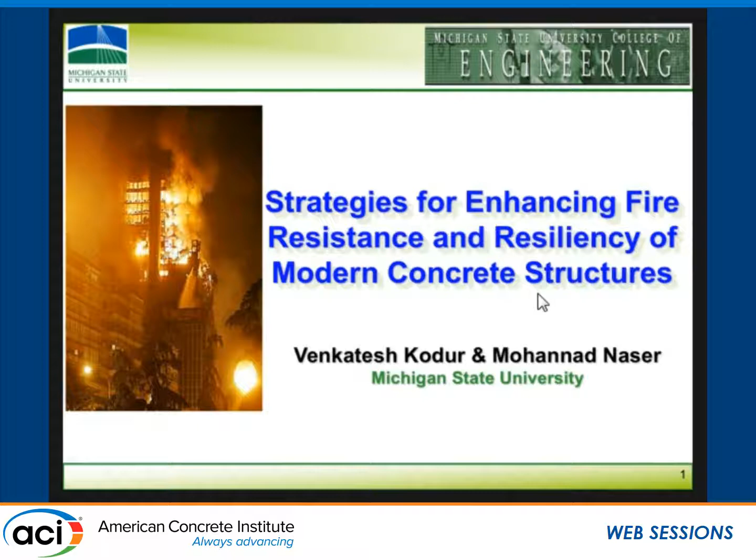Let me explain what modern concrete structures are and why this is important. Conventional concrete, both from the material and the type of buildings and structural systems we have, has significantly changed over the last few years. Though concrete is excellent in terms of fire resistance, we may not draw the same conclusion with some of the new constructions in terms of materials, structural shapes, and the buildings we have. So we can adopt new strategies to enhance the fire resistance. That's what I'm going to show in this presentation.

First, I'll explain why fire is a significant hazard for the built environment. Then I'll talk about the problems with modern construction, basically modern buildings. I'm going to present factors with significant influence based on a lot of experimental and numerical studies, especially relating to new types of concrete. Then I'm going to present some strategies that can be adopted.

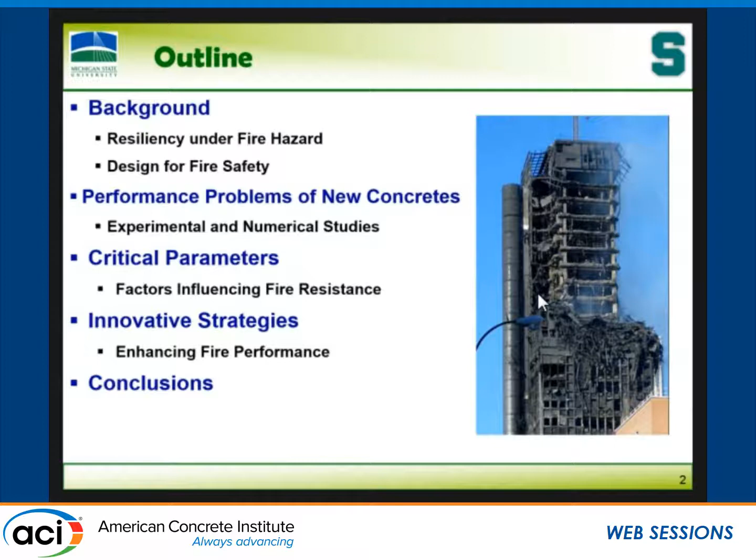Concrete is one of the most widely used materials in building construction as well as infrastructure. One of the main advantages of concrete, though a lot of people don't even know about this, is its fire resistance properties - that's a significant benefit of using concrete. That's how it came into existence as well.

There has been significant research and development activity over the last 3 or 4 decades, especially with concrete technology. Today we are making concretes as strong as steel. In our lab recently we tested ultra high performance concrete beams, one of the projects with the US Air Force, which are 240 megapascals. When I was a student, not too long ago, I used to study concretes which were 20 megapascals. Look at the way we have evolved.

Though I think we are not using 240 megapascals in the field, we are using 90, 100 megapascals becoming common, even in the precast industry. Fire is a major requirement when you use concrete in buildings. A lot of people don't realize this because a lot of it is in background documents, appendices and stuff like that. In fact, that's the governing factor for a lot of designs.

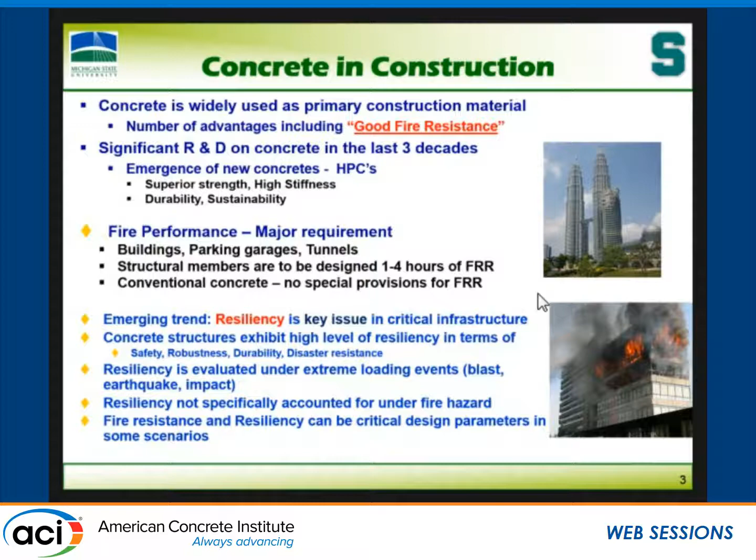The emerging trend over the last few years, based on man-made threats such as terrorism, is basically to prevent and enhance resistance. Resiliency is becoming a key design parameter in a lot of critical infrastructure. Concrete structures typically exhibit a high level of resiliency, no problem there, especially under events such as impact loading, blast, etc. However, when it comes to fire hazard, resiliency is not talked about or looked at in the design scenarios.

This statistics you saw in the first presentation - both Steve's - went through how fire came into play as a design issue. If you look at the data, there were more than 1.3 million fires in the US in 2015. Many of them were residential fires, single family homes, but there was also a significant number of high-rise fires, as the data indicated. It can cause thousands and billions of dollars of damage around the world.

Earthquake is a problem on the west coast of the US. Hurricanes are a problem in other regions too. On the west coast you have seismic, on the east coast or the south you may have hurricanes, in the Midwest you have tornadoes, for example. But fire - from small communities to big communities, everywhere - is a hazard which has to be considered in design.

Fire can happen, as was shown, after most earthquakes - including recent earthquakes in New Zealand and Chile, there were post-earthquake fires. A truck hits a bridge, a huge fire starts - impact doesn't do much, but the fire does more damage than the impact itself. On 9/11, the towers would have been standing today if there were no significant fires.

The towers collapsed not because of the impact, but because of the fire. So fire is a significant hazard for the built environment. It's impossible to prevent all fires. So there are a lot of systems put in place: sprinklers, heat detectors, smoke detectors, exit paths. Then comes the last one, structural fire safety.

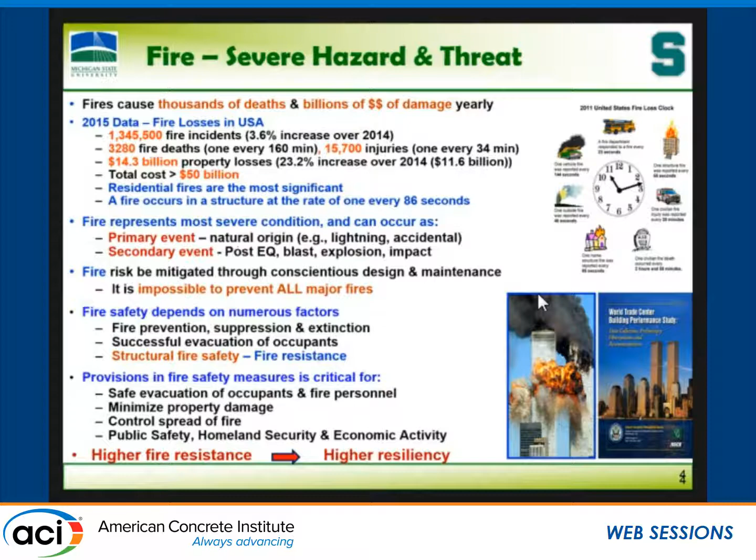That's what was shown in the World Trade Center buildings, recently in California near San Francisco, and in Tehran recently. So anywhere you see it, the more it grows, the worse it is. So to keep that fire small, compartmentation is key, and that's what fire resistance is mostly about. Now, higher the fire resistance, higher the resiliency.

Now, just quickly, there was a fire in this building. This is a concrete building in Delft Faculty of Architecture. I was involved as part of the investigation of this fire with 2 other people from the US. In this building, a coffee kettle caused an electric short circuit, and a huge fire started in this 13-story building, a significant massive building built in the 60s. The fire continued to burn.

First, I think they thought it was just a water leak, because there was a small mini explosion from the short circuit around the coffee kettle. Pipes broke, water went down. Then it took a certain while. There was a lot of wood in this building. Though it was a concrete building, all the formwork, first of all in the architectural studios, there was a huge amount of wood, and all the formwork was left in place.

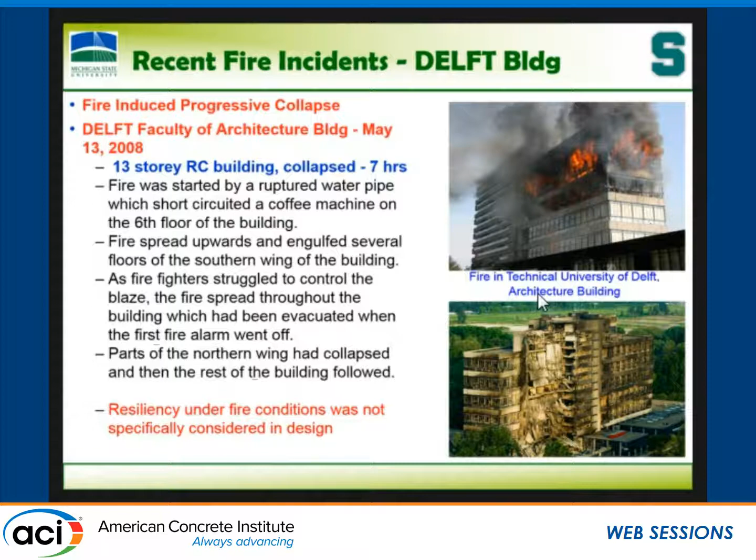So the fire started to burn, huge amounts of fire, and it spread to 2-3 stories. Fifty firefighters would have died if they had not evacuated in time, or if they had not come out in time. The insurance payout was 100 million euros on this one. So the building collapsed. This wasn't designed for fire-induced progressive collapse, which was an issue regarding resiliency.

Now, typically what we do in conventional construction, as I said, has significantly high fire resistance, so never a problem. All we need to do in these buildings is basically provide sufficient cover thickness. If there is a concrete member, all we want to make sure is that the reinforcement temperature doesn't reach about 500 to 550 degrees Centigrade, or 1000 degrees Fahrenheit. As long as you do this, typically no problem.

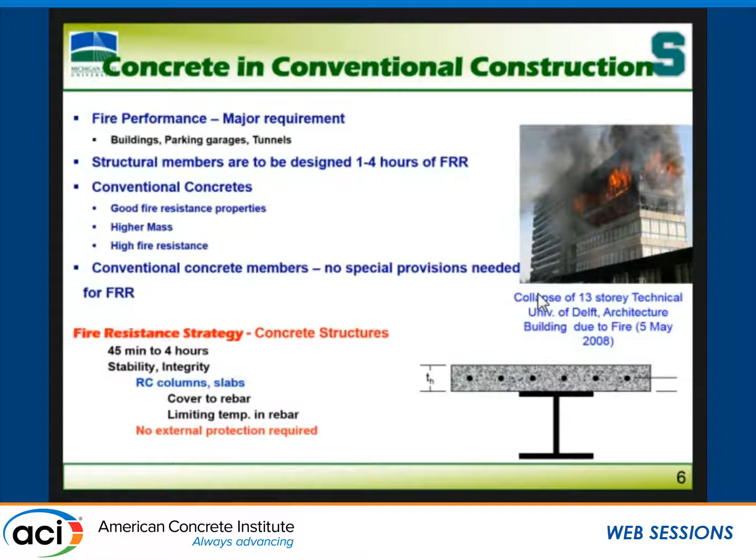This is what we used to do, because of the good fire resistance of conventional concretes. The second thing that matters is the thickness of the concrete member or the cross section. You have to have minimum dimensions so that you have enough mass. In fact, ACI 216 currently specifies the requirements for 1 hour, 1.5 hours, 2 hours, 3 hours, and 4 hours of fire resistance in columns.

If you have an 8-inch column, that minimum cross-section dimension, you can easily get 1 hour of fire resistance. If it's 10 inches, you can get 2 hours. It's as simple as that. Now, this used to be very good, because the more mass you have, since concrete strengths used to be 40, 30, 20 megapascals, the higher reserve capacity you have. Typically, we never used to use all these nonlinear methods and stuff to optimize it in years past.

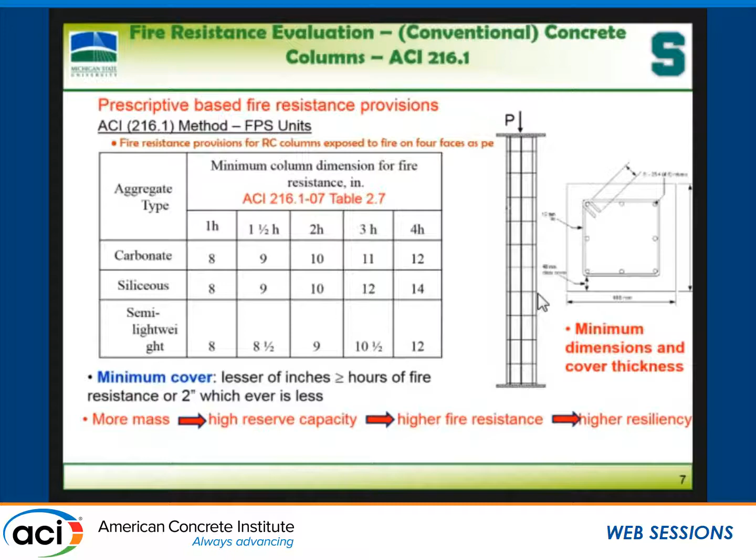Now, higher fire resistance, higher resiliency. Now, what are we looking at? Modern buildings typically are much, much taller than what used to be before. And our cross sections are becoming smaller and smaller because we adopt all this nonlinear analysis, advanced techniques, and all this, as you all know.

Now, from the fire point of view, typically today's buildings are much worse in terms of what I call the fire load. Too much furniture, everything - we accumulate too much junk, whether it's in our closets or our shoes.

10 pairs of shoes, 12 pairs of shoes. Before, traditionally we used to have 1 pair of shoes. My son has about 20 pairs - walking in the gym, he needs 4 pairs: one to the basketball court, from basketball court to walk to his locker room, locker room to come out, and then the snowshoes. It's unbelievable, the civilization is changing.

And this is very bad from the point of view of fire. I know it's bad from a lot of other societal aspects too, okay? And this is very bad.

Our compartmentation has changed. Before, we used to have nice compartments - go to older European traditional buildings. Today's buildings, everything needs to be open. My wife, she wants to cook and watch the TV at the same time, she wants to watch the kids. Everything, you leave it open. It's very bad for fire, very bad from the fire safety point of view.

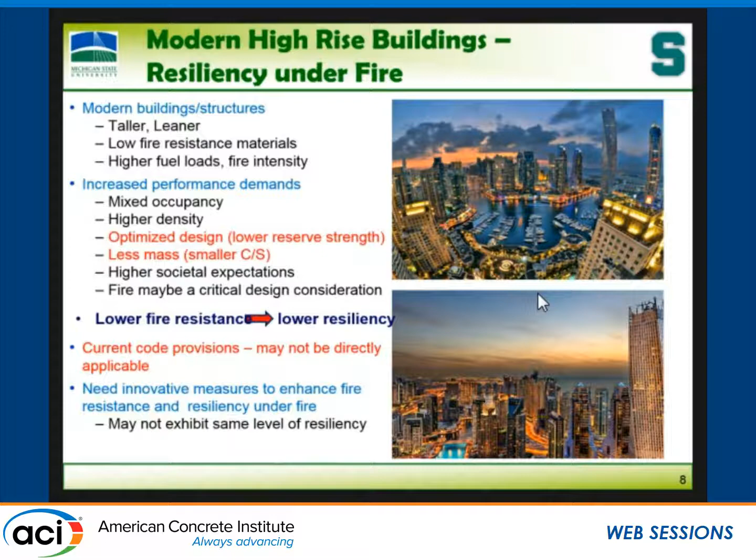So today's buildings - my message here is it's very bad, both in terms of fire loads as well as ventilation characteristics, which can go out of control easily. So current provisions may not be directly applicable. We need to make innovative measures.

Look at it from the structural side - it's not just the building heights that are changing. We used to use nice solid slabs, nice solid beams. Look at today's cross sections - everywhere we are making holes, to send things through, because this is where we are going.

Look at this deck slab - we were reducing, typically lower mass. Because of this, you have lower thermal mass, lower reserve capacity, lower fire resistance. It's not good - this is what is happening.

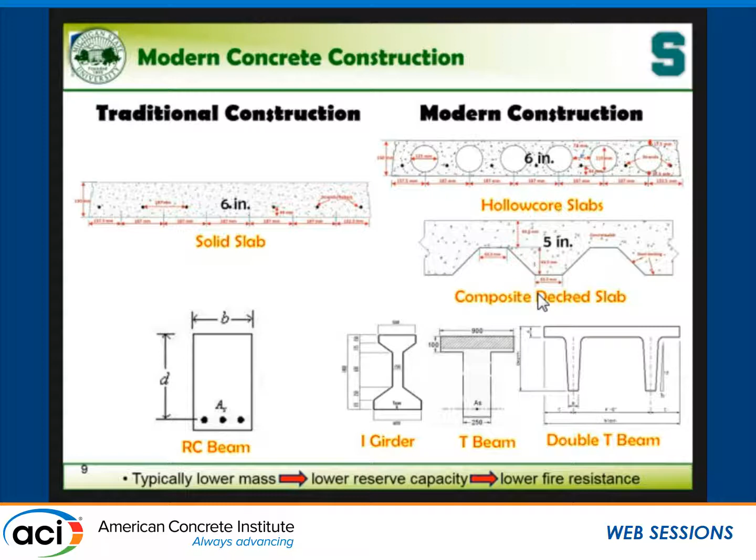Now what else is happening? The third problem we have is these higher strength materials. Any newer materials have lower fire resistance than the conventional materials, whether it's wood, concrete, or steel. Why is it? These concretes are made taking into consideration getting higher strength, higher stiffness - they're all good. Typically they have a lower water-cement ratio, that's where you get the higher strength. And you add a lot of fines - silica fume, fly ash - all these things you throw in, right?

Typically, as we used to know, concrete in my undergraduate days used to be made of cement, some stone, some sand, and some water. Today we add so many chemicals, just like we take vitamins every day. So concrete, you throw in a lot of these admixtures, early age cement - you can get any property. Anything you want: early age strength or later age strength, fine workability. When you add all these things, the characteristics change, especially at higher temperatures.

Now let me explain how. This concrete is a conventional concrete - this is the loss with temperature, strength loss, 100%. See how it drops around 800 degrees centigrade. But look at the higher strength concretes, or modern concretes - can you see that there? Even at 150 degrees centigrade, there is a significant drop.

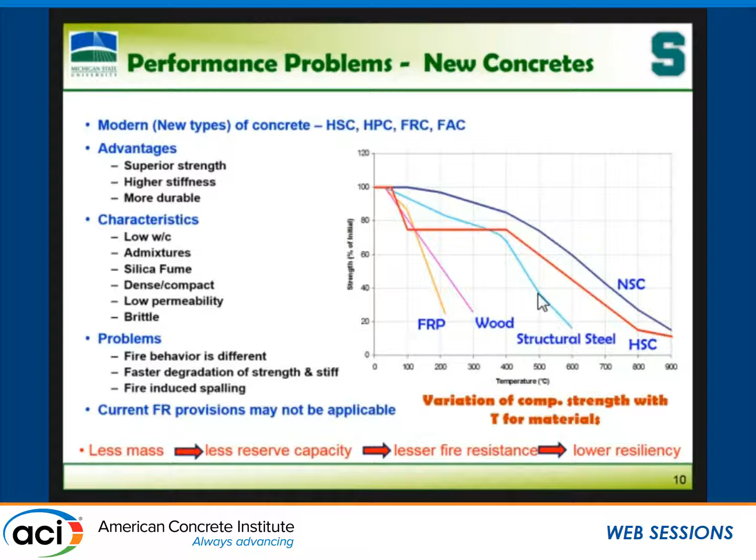This is not good. The second, much bigger problem is the so-called spalling which can happen in concrete. What happens - this is a conventional concrete column. We tested hundreds of these columns in Canada, one of the projects was with the Portland Cement Association. Look at the high strength concrete column.

What is happening? This concrete has, as I said, a permeability of about 10 to the power of minus 16 - that's a conventional normal strength concrete, 40 megapascals versus 110 megapascals. When you reduce the water-cement ratio significantly and put in all these fines, the permeability reduces, which is good from the durability point of view, so everyone is happy with that. But on the other hand, when these columns are exposed to fire, this permeability reduces by about 100 to 1,000 times - it's very hard to pin down these permeability values.

When you have this column exposed to fire - this is the new concrete - water becomes vapor. That vapor cannot easily come out because the conventional concrete has much higher permeability in its pores. But in the new concrete, the permeability is very small, so that water vapor cannot come out, and the pressure starts to build up inside the cross section. When you increase the compressive strength from 40 to 110, the tensile strength only goes up by 2.5 to 4 megapascals - not much.

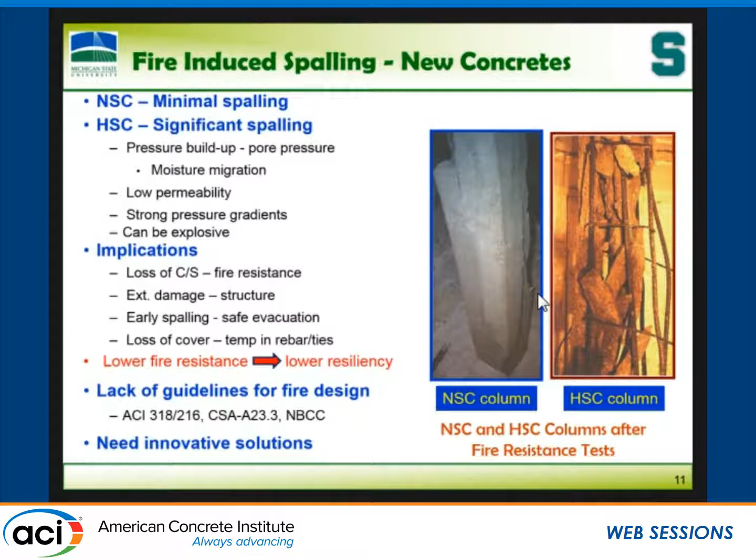This was seen in Eurotunnel, in a lot of practical real-life fires, as well as a lot of tunnel fires. This is a very common issue, especially when the fire scenarios are very intense. We have done a lot of work, as well as other groups, to establish the problems with this newer type of concrete and strategies.

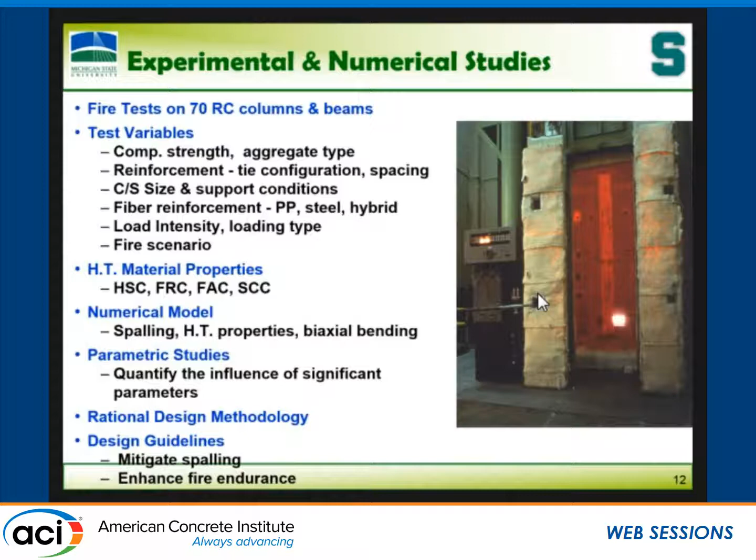We carried out experimental and numerical studies. A number of PhD students graduated in our group, as well as around the world, a number of studies have been done, and some guidelines have been developed.

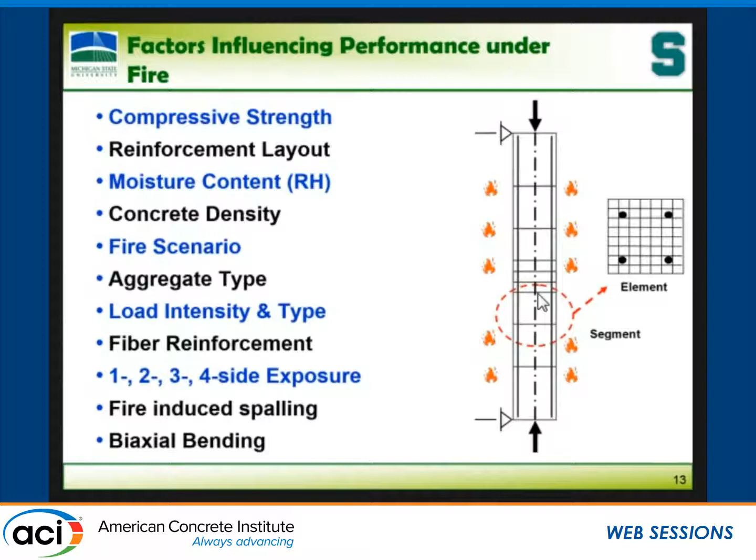I will quickly go into this. I don't have time to go into all the studies, but let me present something quickly to show you how the high strength concrete, or modern concretes, have lower fire resistance as opposed to traditional concretes. A lot of these parameters influence the fire resistance, not one or two. They are interdependent, very complex.

Now look at this. This is a conventional concrete, normal strength concrete. Nothing happens till 6 hours. Take it for granted—these are real tests done on full scale columns at the National Research Council of Canada.

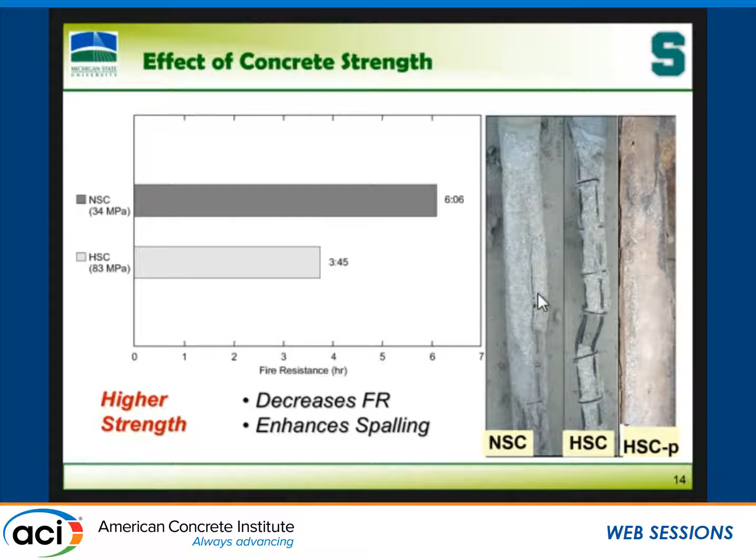But for higher strength concretes, can we expect the same thing? No, it reduces. Up to 3 hours, maybe you are lucky if you get it sometimes.

Then look at the confinement. Conventional concrete, you can have ties like this—this is the conventional way of providing ties. But if the same thing is done for higher strength concrete, look at what happens. Even within 90 minutes, this 110 megapascal column, the ties open up because of the pressure which is generated.

I told you about the spalling. This is what is left after 90 minutes. But if you bend these ties at 135 degrees, wonders happen—this will last for 3 hours, the same column from 90 to 180 minutes.

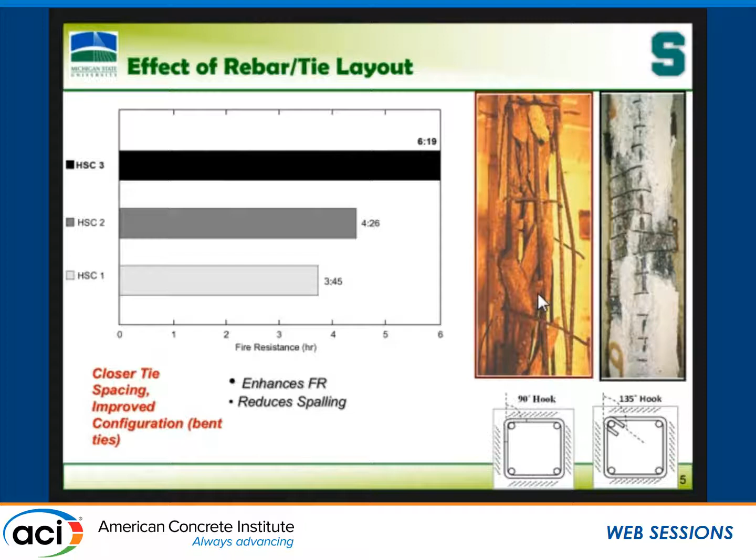Now let's look at that—I don't have much time. The problem is in concrete structures or steel structures, you all know eccentricity is a significant problem, eccentric loading. In fire, we don't even consider this in today's design, biaxial bending or uniaxial bending. Perfectly, you have a column which is loaded uniaxially.

But after 15 or 20 minutes into fire, if it is 4-side exposure, no problem. If it is 3-side exposure, or 2-side exposure, or 1-side exposure, what happens? One side is losing strength quickly, but the other side has significant strength remaining, so your center of gravity doesn't coincide anymore.

So you are going to get either uniaxial or biaxial bending. You all know, I don't have to explain to you, biaxial bending is significant—this is not considered. It is much more a problem with newer constructions and newer high strength concrete, especially because you are using a very small cross section, small mass.

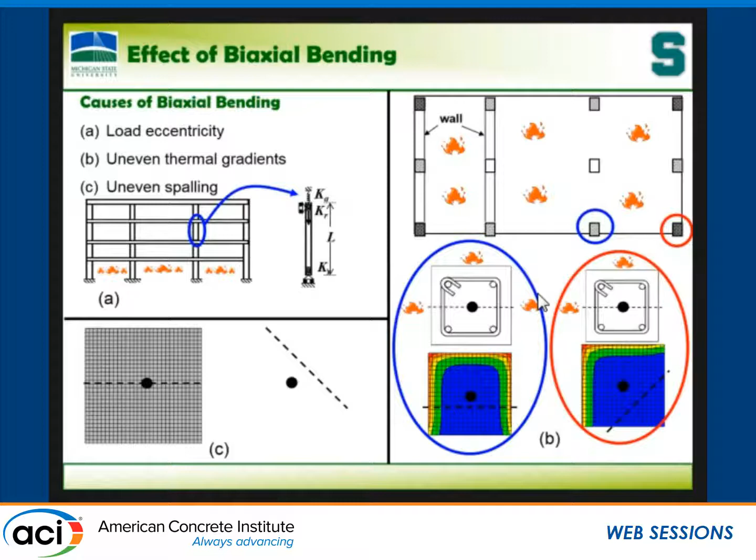So this is 2-side exposure versus 3-side exposure. We always think 4-side exposure is the worst, right? Look at this—this is 4-side exposure versus 2 adjacent side exposure. This is not even properly accounted for in codes and standards.

And typically in a building you can see this. This is a 4-side exposure, but if there is a wall next to it, if the column is built into the wall, you might have 2-side exposure or 1-side exposure.

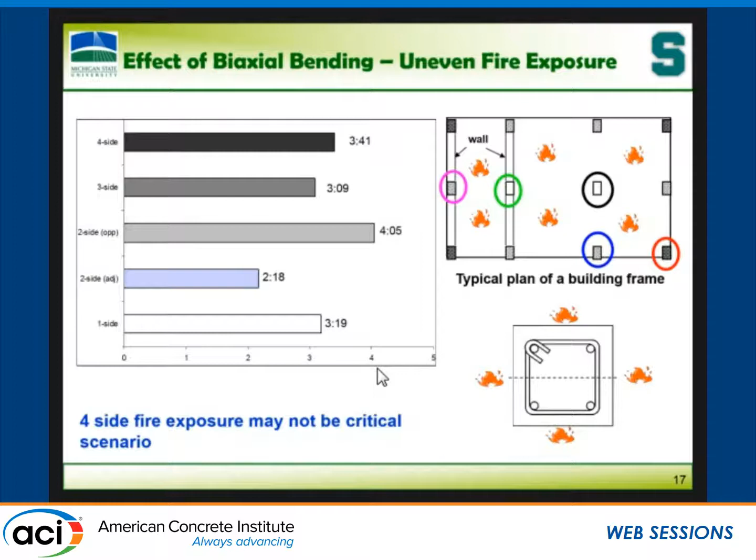Okay, this is what happens. This is the 4-side exposure, as you can see, this is the axial deformation on this column as a function of time. And this is what happens with 2-side exposure. So 4-side exposure, a lot of people think is the worst case scenario—more sides of fire exposure, maybe worst.

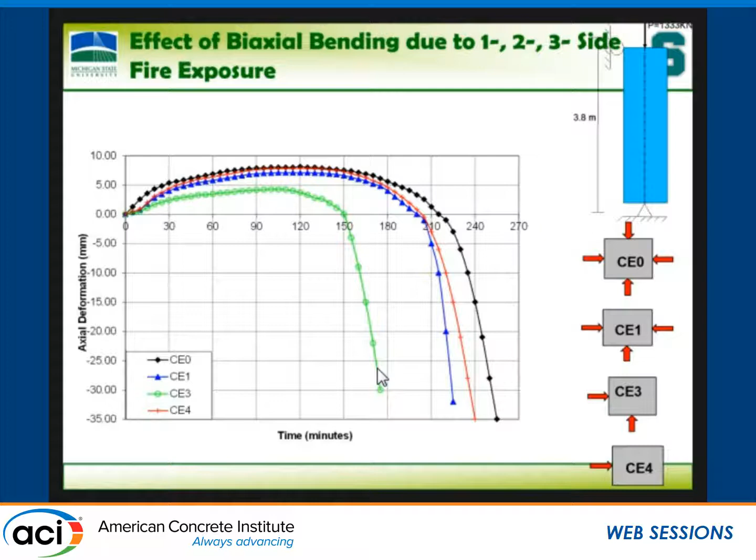Need not be the case. Now, fire severity is a significant thing. Today's fires, as I mentioned to you, are much more like this. We design under ASTM E119 fires, but today's fires, a lot of times, can be very rapidly growing if there is a fire in a parking garage or in a structure, because you have hydrocarbon effects.

Even all these combustibles are much worse than cellulose fires. So much damage is done when the fire goes up, and then sure, it cools down. But the fire resistance under some fires may not fail, while under some design fires, it may be much worse than standard fires.

Now, look at one of the things to overcome this—using fibers. As you can see, this is a concrete column, a high strength concrete column.

Spalling happens in spite of using those ties. But if you add polypropylene fibers...

You don't need too much, about 0.1% by mass. You throw in these fibers. What happens is, when fire occurs, the polypropylene fibers melt at about 160 degrees centigrade inside. They are discontinuous, spread out throughout. When they melt, it creates channels of pores. And through those pores, your pore pressure gets alleviated, no spalling.

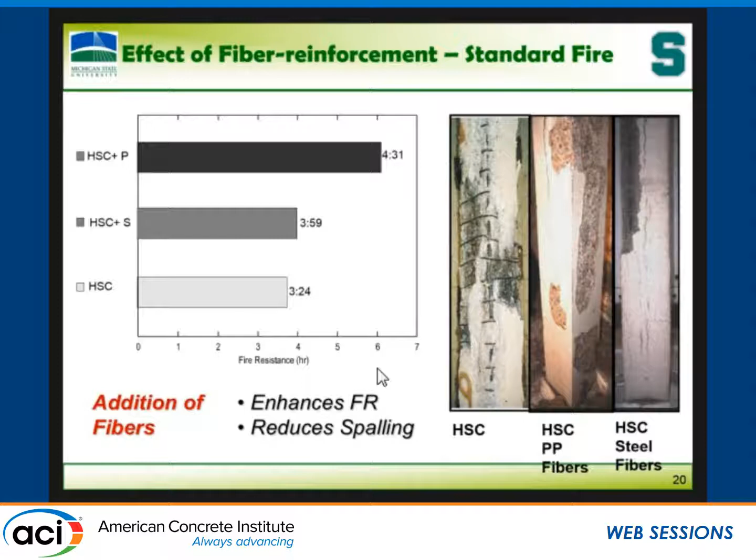So this can continue for a long time. And look at this, even after 3 or 4 hours, very little spalling. You can add steel fibers as well, they are beneficial too. If you want to use it, that's a different story for a different application. But adding fibers can significantly enhance the fire resistance.

These are the same thing, I'm repeating it, so let's skip this. You can use hybrid fibers, especially in tunnel structures. So what are the strategies you can adopt?

Adding more lateral confinement significantly enhances the fire resistance, just like in the case of seismic design. So it obviously enhances the resiliency.

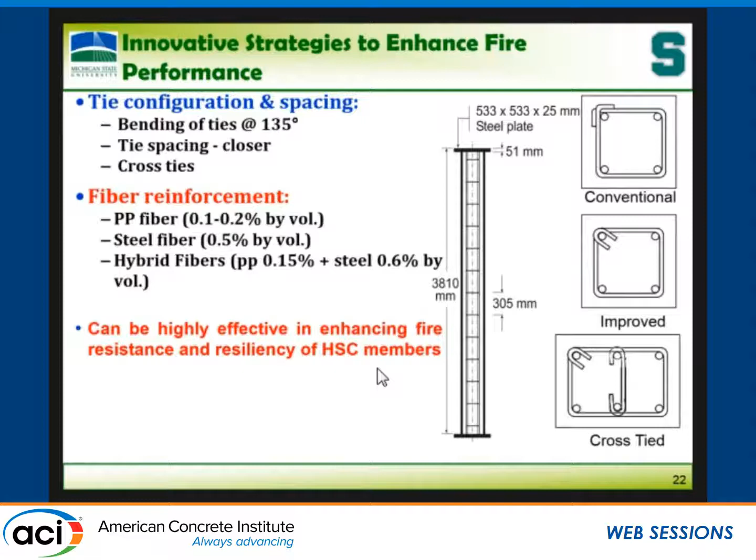Then you can make small modifications—I missed one point, adding fibers obviously, either polypropylene fibers or steel fibers, or a combination of them in different applications. We have tailored this for different applications.

Then you can make modifications either in mix design. Typically limestone aggregate will give you some extra fire resistance, right? Lower the load, higher the fire resistance.

You can add protective layers. That's the European code approach. I don't know how much it is beneficial from a cost-effectiveness standpoint, but the other ones are much more effective.

Just to mention to you, based on our research, this is all incorporated in our ACI 216.1, the latest edition which came out just last year. So ACI 216.1 has these provisions.

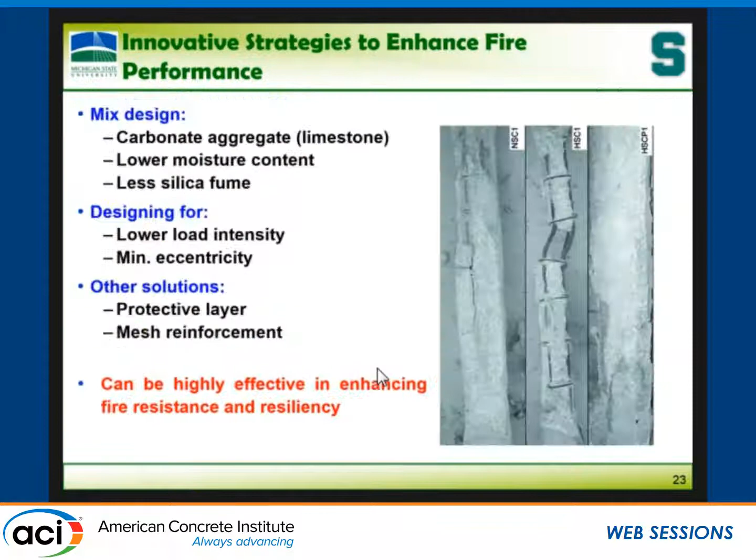Now, the other most important thing, an advancement which is happening, is to carry out rational advanced calculation methods, both from the fire resistance and resiliency point of view. This is not typically done in concrete buildings today, but if you want to establish and show that concrete structures have good fire resistance while taking realistic conditions into account, you have to do a system-level analysis.

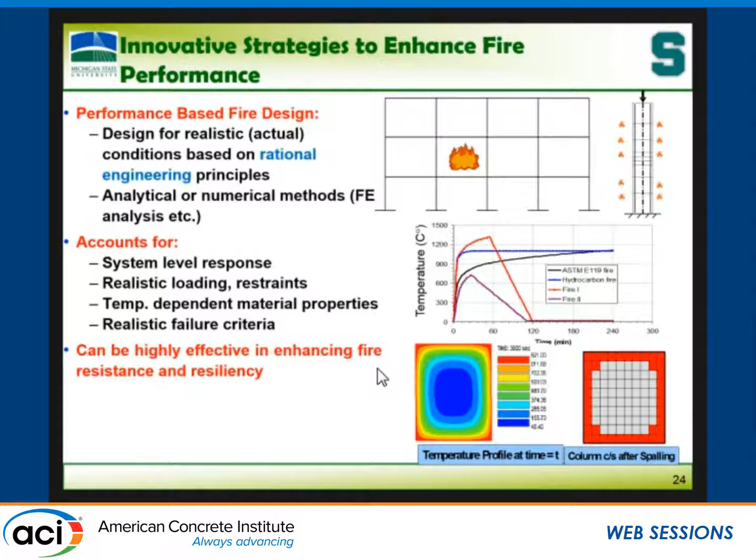By accounting for different fire scenarios—tailoring fire scenarios, load levels, restraint conditions, actual material properties, as well as failure limit states—you can establish this. The procedures are there, and I don't think we have much time.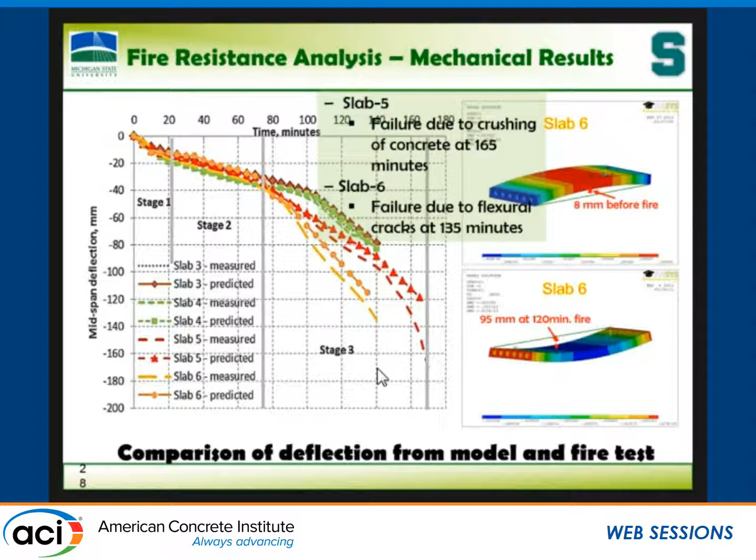So you can generally model this for a specific structure or structural element, both at the elemental level or at the system level, to enhance fire resistance. You can come out with some strategies.

Now, basically in conclusion, all I want to say is resiliency under fire conditions should be considered in design, especially for critical structures. It's very important.

There are a number of problems with respect to newer types of construction, especially with newer types of concretes as well. However, you can develop proper solutions as shown here, either through modifying the tie configuration or fiber reinforcement. You can develop these through proper experiments and numerical methods such as performance-based design.

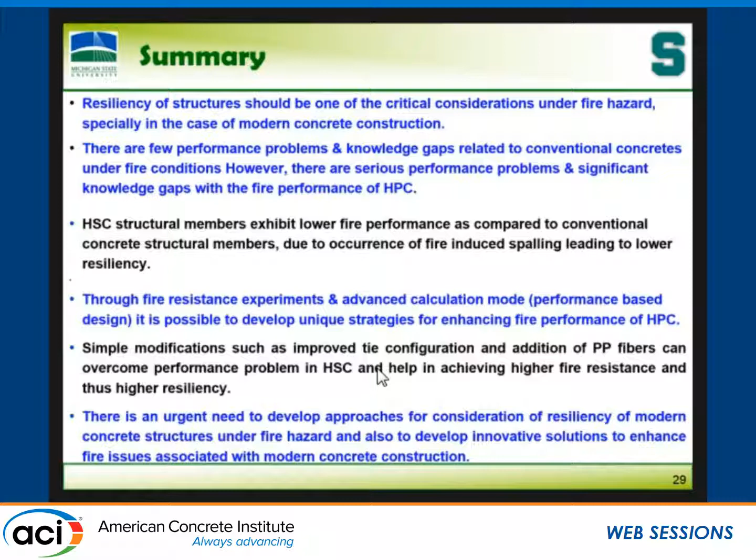But still, there are a number of research areas which are missing, especially related to spalling—for example, how to predict spalling, when spalling occurs, where exactly it occurs. The predictive models are still not there. So I think that's where the research should be going. Thank you very much.

Yeah, so I think I heard you right at the end, I'm going to ask it again. So from the standpoint of spalling, we still don't have a good handle on that—is that a fair statement?

Very good statement. People are working on it, but it's very hard. I think the problem is at higher temperatures, the instrumentation is significant. Even today, with all our advances, we can only measure temperatures at higher temperatures. Strains we cannot measure. Deflections we can measure indirectly. It's a big problem. Same thing with spalling pore pressure—I think there are no methods at all. So I think there is no handle on that.